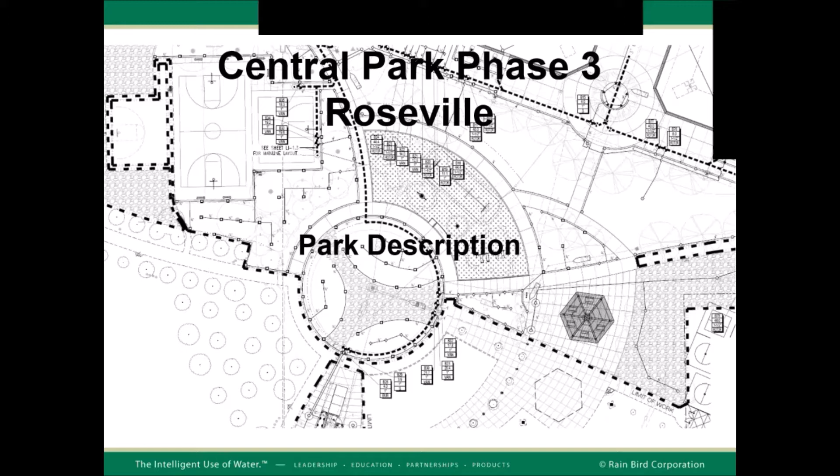True, and you shared your plans. We appreciate that. And I think this was one of your last set of revisions. Tell me just a little bit about how those got on there. I think before, you guys had the city request MP Rotator. But why the change?

I think when it came down to it, they were looking for a higher GPM, still within the low flow nozzle. And I think they just liked that output a little bit more. Okay. No, that makes sense. And you and I had talked before, and I know I came into your office, we did a live demo display in there, and we were talking about how you like the larger droplet size versus the competition on that one.

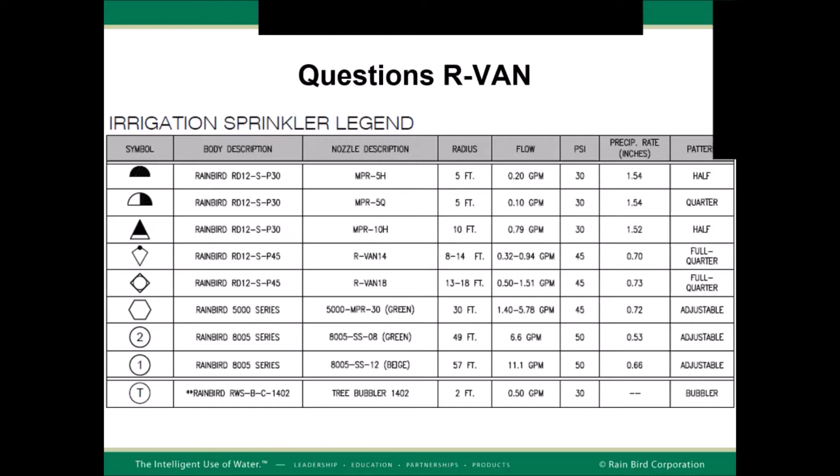All right, now let's take a look. Go to the next one. Also looking through there, we talked about how sometimes it's good to talk about the differences between some of the different products, not necessarily to make any changes, especially on an approved project. Would you think you guys would specify a check valve product versus a non-check?

In this case, it simply was by request of the city. We're just following their standards. No, that's good to know. And I always wonder how this works. I mean, I've been working with manufacturers for quite some time, so I'm not always working directly with the city.

We do have people that work directly, our public account managers. They work directly with cities as far as preferences and doing demonstrations, that type of thing. If there is something new on the market, oftentimes we can have that conversation with their departments to see if that's going to be acceptable or not.

Value engineering sometimes, or I think you and I had spoken before about, they're maybe not big fans of drip irrigation or drip line, and they want to go more with bubblers, RVANs, other options as far as their product choices. But when they do use some type of dripper line, the check valve would definitely save them some money and definitely save them water. So that may be somewhere, not just with this city, but with other cities, that we can focus on that education.

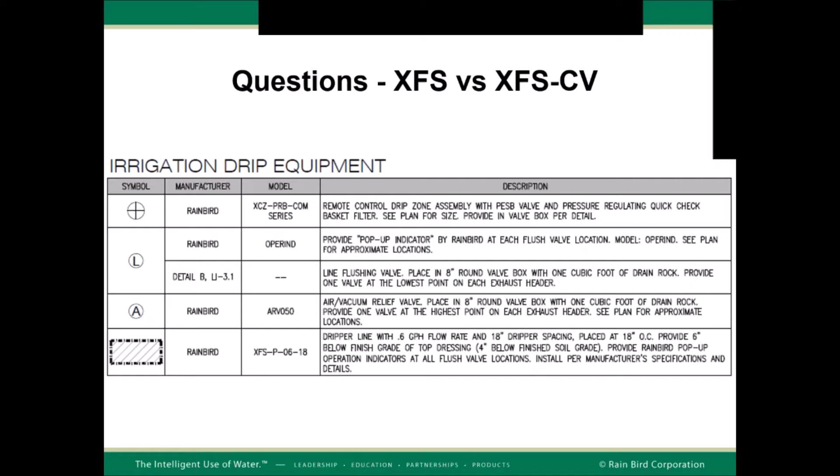Oh, yes, absolutely. Here's another, this is a good detail showing the XFS, and you can see up here where we've got the air relief valve. And we talked about the air relief valve. Is that something that you don't need if we have a check valve? Because the check valve holds all the water in the tubing and doesn't allow any drainage, so you don't have any air to expel. So if there's no air to expel, you don't need an air relief valve at all.

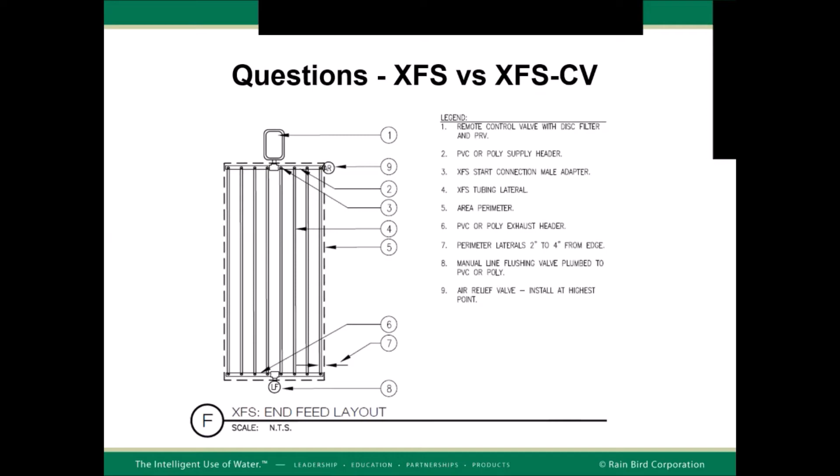I think to indicate that there'd be a PVC, is that correct, Angela, PVC header? Yes, it would be. So we do have, and this does get submitted quite often, something called, are you familiar with our QF header? I personally am not, no. Instead of doing PVC pipe and having to glue and cut and do all those other things, we can actually, and we can go to products. And if you look at drip irrigation, we can go to there.

And we have a special tool that will even help you put this together quickly. And it works with curves, unless your office only designs with rectangles. Yes, of course. The landscape is always that way, right? Yeah, exactly. Now, there might be one office out of 50. Yeah, well, you never know.

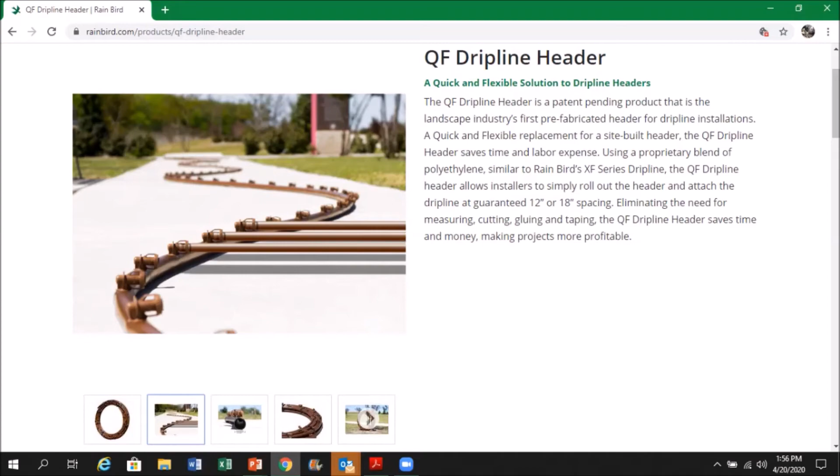It'd be like, think about it, Frank Lloyd Wright, all his are angular. Yeah, that's true. It's more modern that way. Yes, exactly.

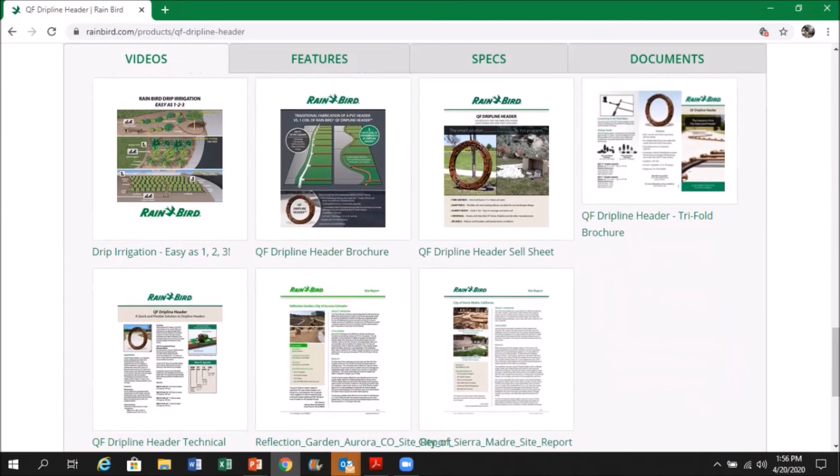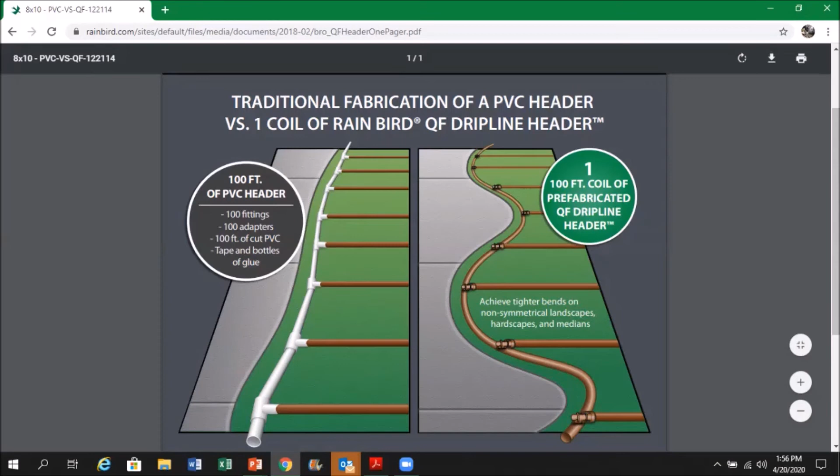So this is really a great option. Some use it under turf and all kinds of things like that. Or you can go down here. I think this one is a nice example. These are a lot of our little PDF documents. When it pops up. On here, I've done these before. We haven't done this yet in your office, Angela, because it's actually quite a bit of fun.

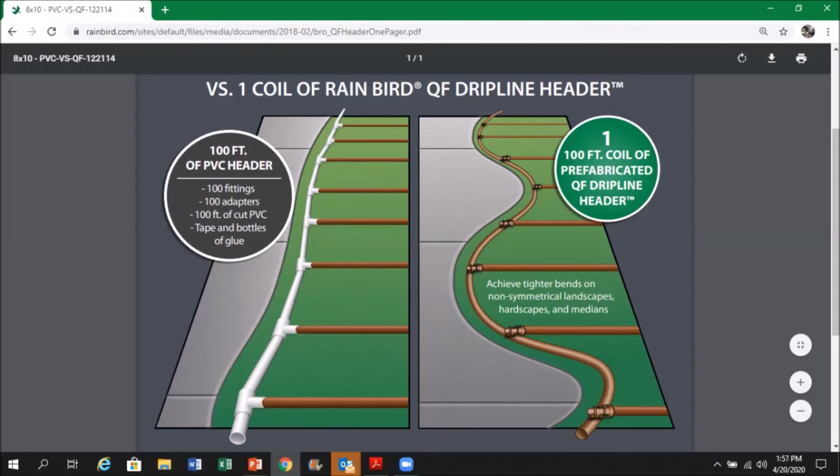Where you build these on the table, and then you build this on the table, except I don't use glue. And you have to cut the PVC, put this together, the extra fittings and everything, and then you have to put this together. And it's about a third less time, and it's less expensive materials. So the cities, they really appreciate this. That sounds like a big savings on labor, obviously. Yes. So that just shows you a couple things.

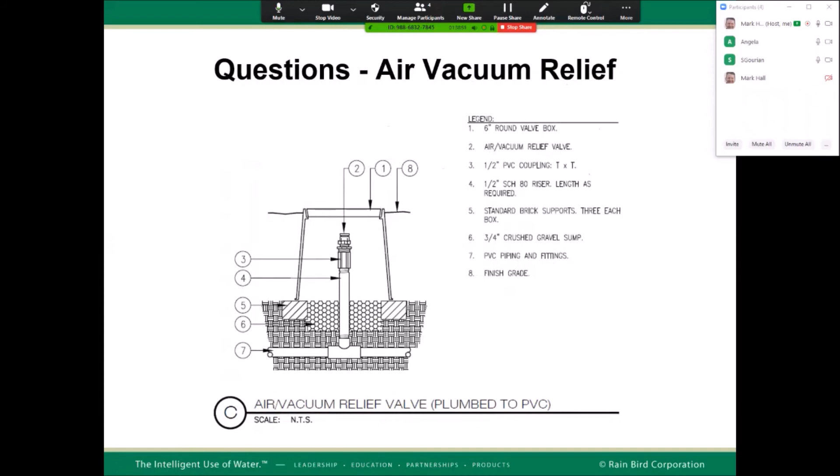The air relief, we already talked about that. I'll just show you a couple different options. I think this is a really cool detail. I think you said that you guys have drawn this for the city. Correct. It tells the story. You have a better understanding when you go through it of how things work and get built and everything. So it's important. Absolutely.

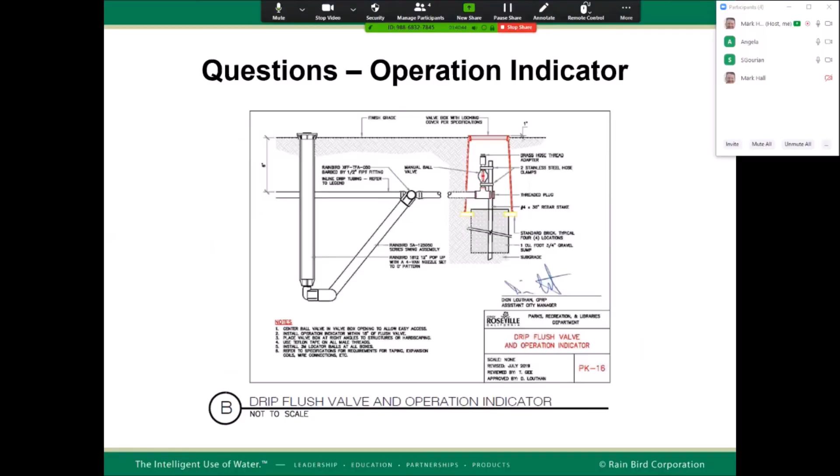So let me switch over to, I was looking at your detail with the operation indicator, and this is like a regular 1800 12-inch pop-up. There are some differences between that and just say the actual indicator. Let me flip over to here. Find it in my trusty catalog here myself.

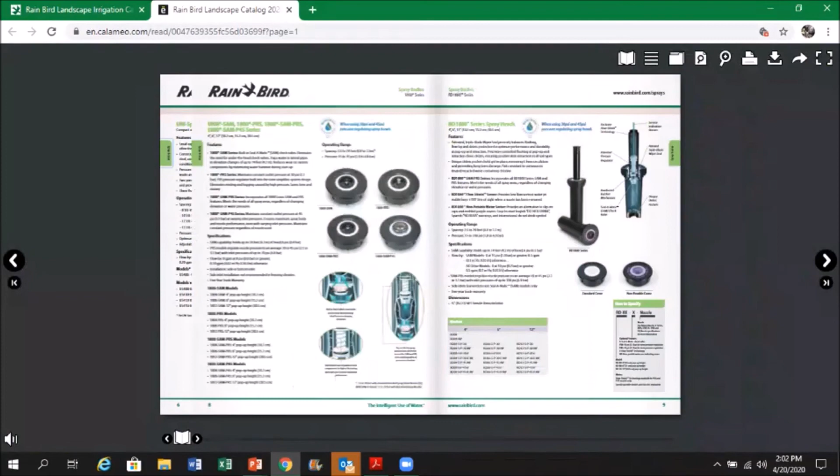It is in your trusty catalog. I know it's in here somewhere. Now you just have to hold it right up to the window, I know. Oh, I can't even find it. No, you're right. That was a very good idea that we'll just go to the trusty catalog. Looking at it here. Operation indicator. Page 40 or page 142. No. That's what keeps me young, is doing it the old school way.

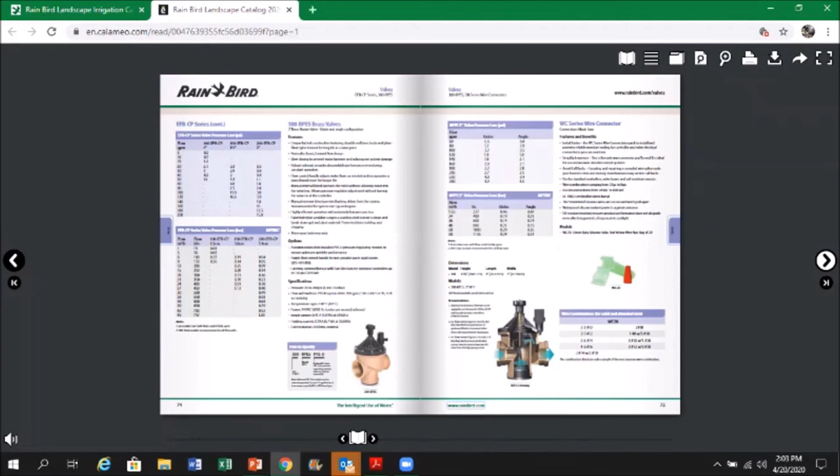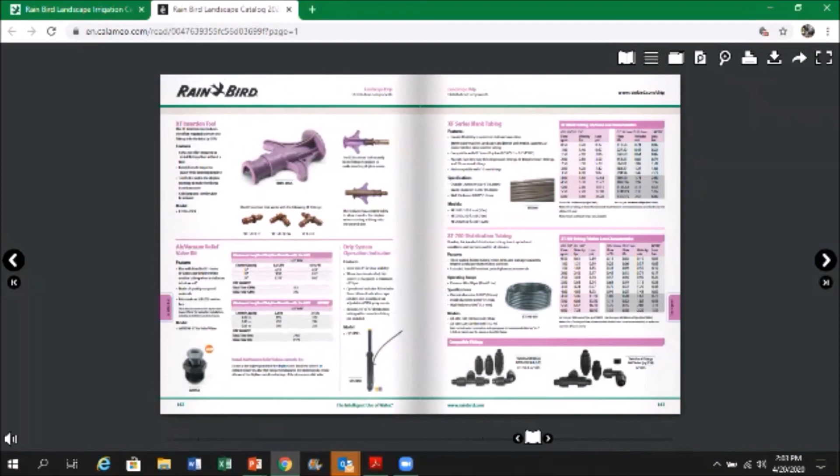You know what? Look down here. I see it moving. Wow. I should have done it. See, look at it. I learned something new from you again. There we go. Aha, that looks drippy. There it is. There we go. Oh, one more. There we go.

Well, here's what it says. When stem is extended, drip system is charged to a minimum of 15 PSI. So there's a flow by. You don't always see that spec in the actual catalog or online, but this particular one, see, this has a 1/4 inch.